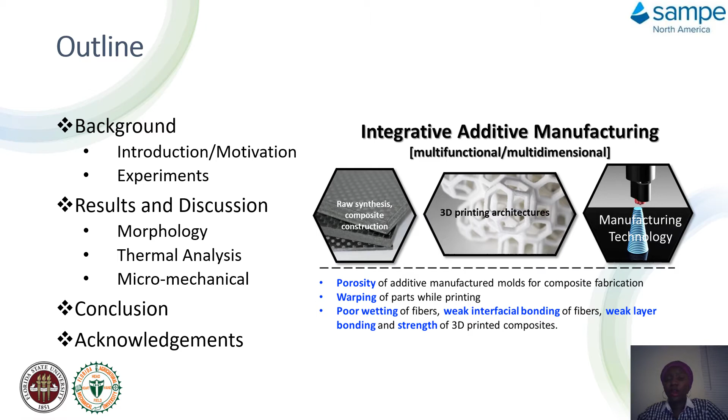The introduction focuses on how we can easily mix two materials together and get good processing, as well as using additive manufacturing to get the final outcome. The uniqueness of this composite is that it has good properties, and it's also high in mechanical properties.

In case you don't know what ML means, ML refers to materials that glow under mechanical force, and this material exhibits light intensity in the dark. As the force increases, the light emitted from the material increases as well.

The problem now is how we can get a good composite without matrix mode failure, delamination mode failure, fiber mode failure, and penetration mode failure.

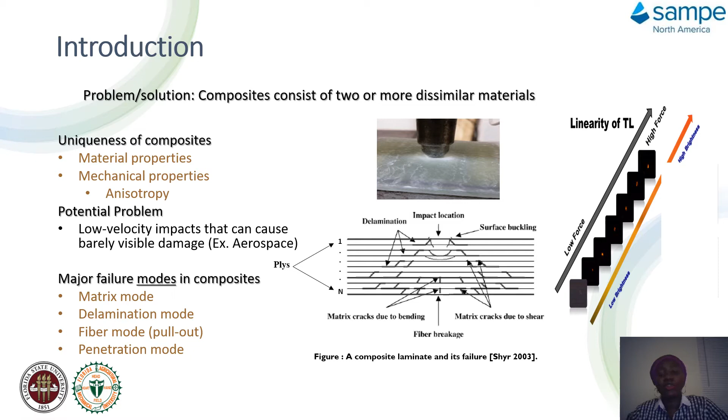Some researchers have been able to use ML with concrete material to show how light intensity is exhibited from this material.

Technology has shown an increase in the multifunctional use of material in composites from 1912, gradually progressing through use in radiography, ultrasonic applications, and continuing up to 2020. 2020 target research focuses on big data, in which we've been able to add to the achievements of this technology, which is a third generation composite.

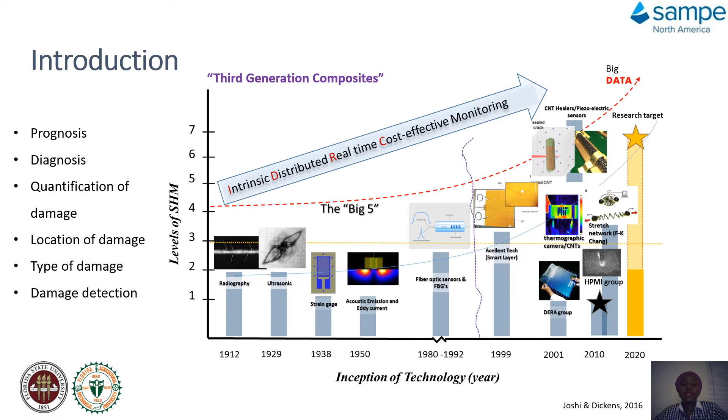In that way, we can easily diagnose the material, check for quantification of the damage - whether it's high or low - and easily locate where the damage is and the kind of damage the composite is exhibiting, and also detect the damage easily without complete destruction of the material.

Moving on to the application of ML. ML has been used for concrete, and also in fiber reinforced polymer composites, whereby ML is mixed within the composite together with the fiber material.

Here you can see Sage in 2001 shows how triboluminescence intensity is exhibited when there is force or damage in the material. The highest point of damage shows that's where the damage in the material is being exhibited, which is about 40 intensity units.

Also in 2011, Dickens shows that crack monitoring in short fiber reinforced composite can easily be detected. When you have a short micro crack within the composite, it can easily show multiple emissions as the load increases, and this shows the light intensity on the composite without complete failure of the material. Gradual micro cracking within the composite shows emission of light.

On the surface, the matrix cracking identification shows that there is a frequency of ML in the range of 2,691 Hz to about 2,813 Hz, as shown by Joshi in 2001 as well.

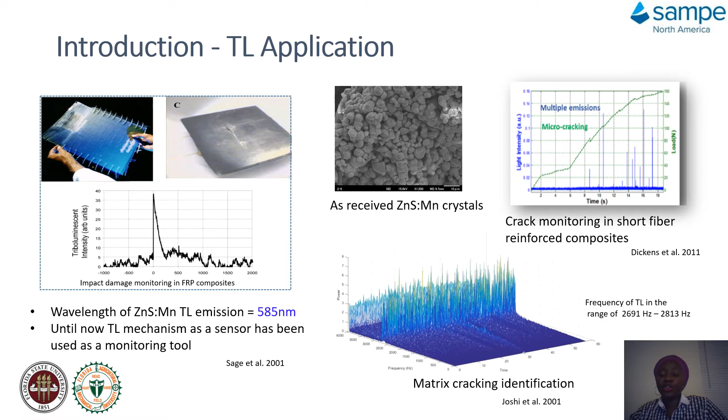Moving on to our own research, our experimental approach uses two materials: polystyrene and zinc sulfide manganese. Polystyrene is used as the matrix, and zinc sulfide, which is our ML material, is a powder - a multifunctional material that was added to make a composite.

These two materials are processed using melt extrusion. This melt extrusion mixes the two materials together, and we collected our filament. Multiple processing cycles were carried out.

The first process is mixing the two materials in the extrusion. The second process is breaking up the collected material from the first process, grinding it, and re-extruding it for the second process. The third process involves collecting the filaments from the second process, breaking it down, mixing it again for the third time, and collecting the material.

So these three processes were examined using the SEM and CT scan to show how the TL crystals break down from one process to the second process to the third process. Then after that, thermal analysis was carried out to show the thermal stability or thermal degradation that affects the material when processing in the extrusion.

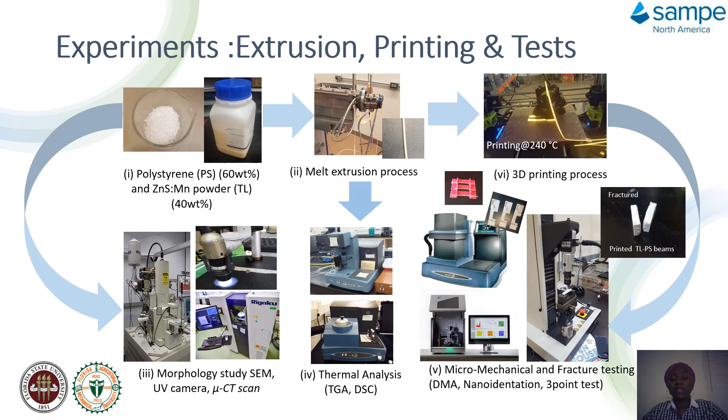DSC shows the glass transition temperature or melting temperature for the material, in order for us to know the temperature to set when printing the filament from the printer. After that, we print out a beam to be able to use to test for 3-point bending, fracture test, and also later test for mechanical properties using nano indentation as well as the DMA, dynamic mechanical analysis.

So after carrying out this test, the SEM result and the UV light on the first process shows that there's a crystal within the surface of the material in the first process, and when we move on to the second process, the crystal is not as visible as the first process. Same thing happened on the third process.

And when we try to check with the SEM, it confirms that the size of the crystal is being reduced from one process to another. When it goes to the third process, the multi-processing cycle affects the crystal, making it more evenly dispersed within the composite, but making it much smaller than the first and second process. With this processing cycle, we were able to achieve better particle distribution, and also it helps reduce the sizes of the crystals within the composite.

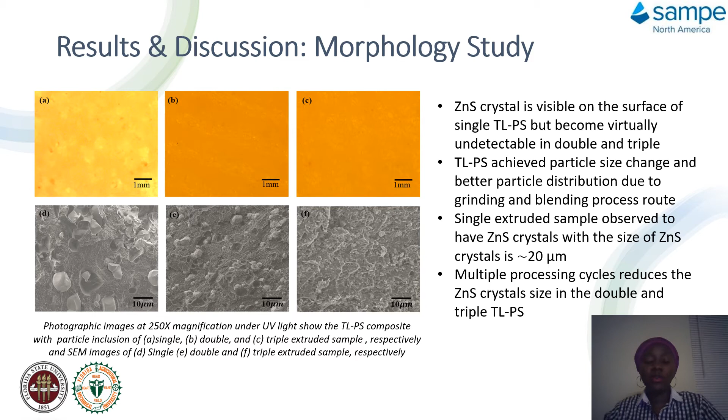So to further confirm what the third process looks like, a filament was used to reconstruct and show the CT scan image of how the filament looks like. From the filament, you can see the crystals are evenly distributed, and in very smaller sizes.

From the surface of the image, we can see the white particles are the crystals, which shows it's almost the same size, about 3 microns, broken down to very smaller sizes, which is achieved at the third process compared to the first and second process. This shows that the multiple processing of the filament has a positive effect on the dispersion of the crystals within the composite.

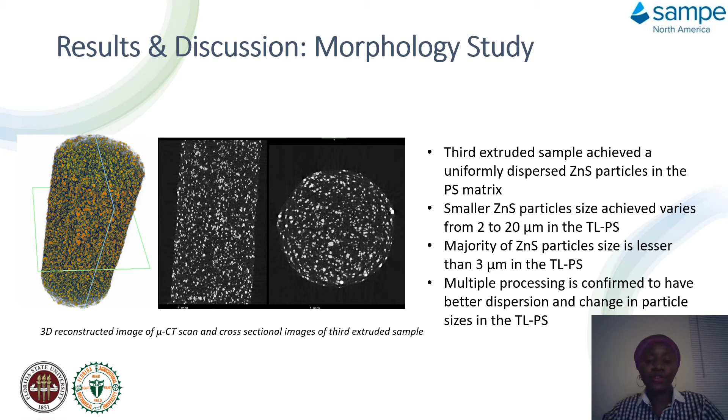So to further understand the thermal analysis of the composite, we tried to compare polystyrene and the composite. We did polystyrene also for 3 processing extrusions, same as we did for the composite extrusion. For polystyrene, we can see there is a continuous gradual weight loss, as well as for the composite.

For the composite, it shows there is a slight weight loss because the initial weight of the TL inclusion in the composite is 40 weight percent, but from the TGA result, it shows it's about 30 weight percent, which means it's lesser than the weight percentage inputted at the beginning of the process.

Also from the DSC, it's confirmed that there is a higher temperature in the composite, which shows that the effect of the TL, which is a zinc sulfide crystal in the composite, suppresses the polymerization effect on the molecular chain of the whole composite, and also makes it more thermally stable than the polystyrene without the TL inclusion.

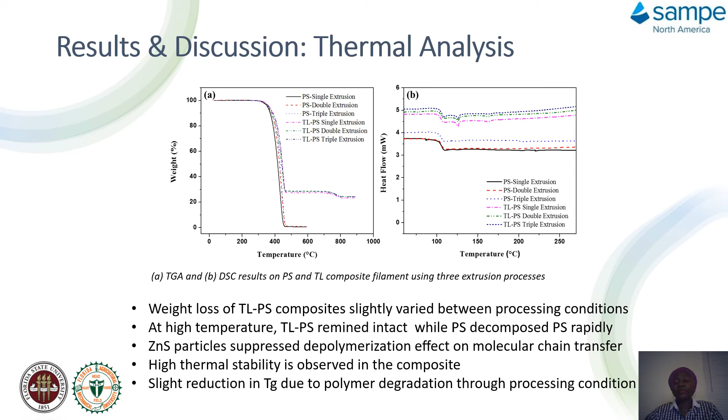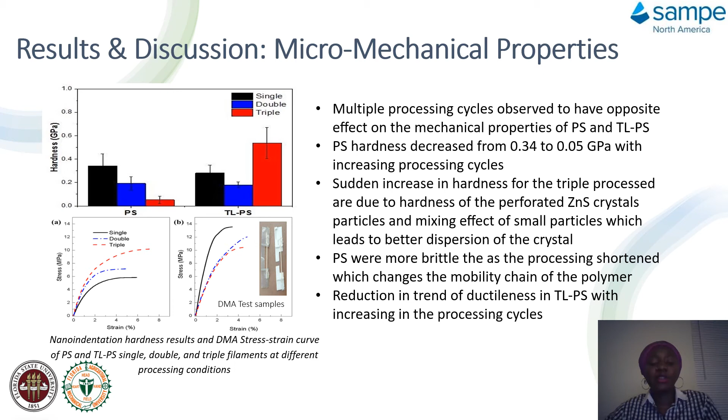The 3rd one is much more ductile than the 1st extrusion, and this reduction in ductility is due to the increase in the processing cycle of the composite. And for the polystyrene, the processing shortens the mobility of the chain in the polymer, which makes it more brittle. And because there is TL inclusion in the composite, it reduces the trend in the ductility compared to polystyrene.

So after carrying out the thermal analysis, we carried out a 3-point bending test. This 3-point bending test is to show, inside the MTS mechanical test system, a comparison of the TL signal emission from single to double process to triple process. And you can see right here, the uniqueness of the cycle is that as the processing increases, the emission increases without much load.

However, for the single extrusion, you need much load for it to be able to emit a higher light. And the light is not as high as the triple extrusion, even though that needs little load. So the light signal for the third extrusion shows about 3.82, which is 4 times higher than the single extrusion.

And this improvement is due to the inclusion of TL as well as an enhancement of the load transfer of the zinc sulfide crystal particles, which can move from one crystal to another, because they are much smaller and evenly dispersed compared to the single processing, which has larger crystal sizes. And this processing effect on the polymer matrix also shortens the polymer chains.

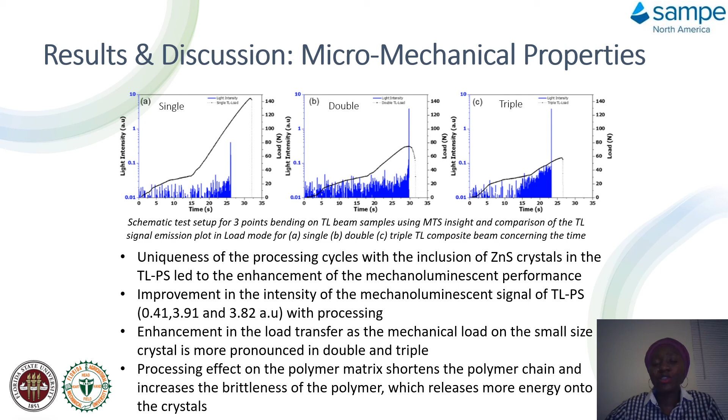So the polymer chain shortens as the polymer increases in brittleness, and this helps the material to release more energy on the crystal, because the composite becomes more brittle, and also helps the energy to transfer from one crystal to another, thereby exhibiting much more light intensity in triple compared to single extrusion process.

So in conclusion, we were able to achieve our goal, which is inclusion of the TL emission in the printed composite, and we were also able to understand the processing condition on zinc sulfide particles, which has a vital role in allowing the mechanoluminescence response in the printed composite. And we also achieved a more thermally stable material without destroying the zinc sulfide, a non-destructive mechanical property after multiple extrusion cycles.

And the multiple extrusion cycle shows a better improvement in the interface between the TL crystals and the polymer, because it helps the energy transfer from one crystal to another, and also modifies the property of the composite. And this helps the composite to exhibit a higher signal at the third processing compared to the second and the first processing. Altogether, with TL composite material, we can easily detect small damages in a structure without complete total failure of the whole structure.